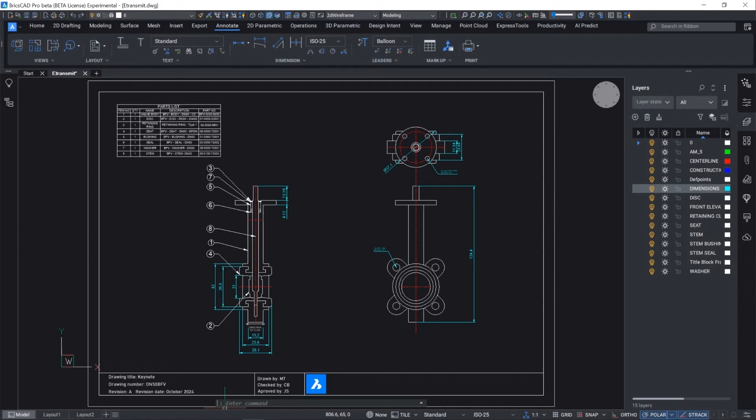For the breakout, we're going to create some geometry from scratch because we understand this is something you guys do daily. So we're going to be using the cross-section of the butterfly valve, and I've sped up some geometry creation, but this gives us a good chance to look at the new fresh interface of V25.

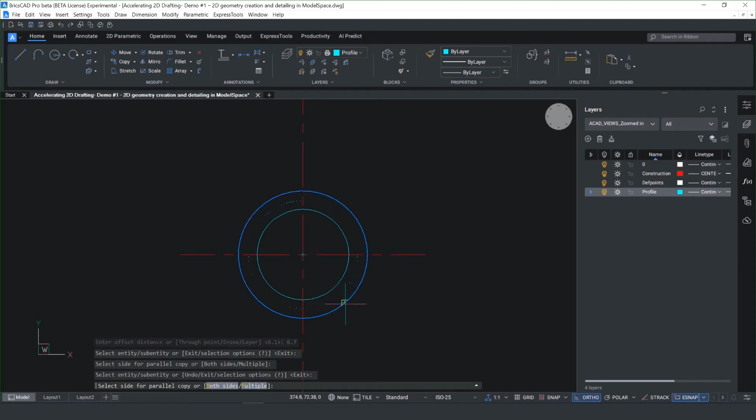You'll notice here the status bar, the icons are a lot cleaner and a lot crisper, and accessing the menus is very easy. The quad command has been updated as well with additional context menus, and also the ribbon layout is much improved, giving you a lot cleaner interface to work with.

Using 2D parametric constraints on this tab enables me to show you one of the new features in V25. You may have noticed in the past when you overdefine a profile, it will then conflict and bring up an error message. In V25, we've got the option now of creating reference parameters to the values.

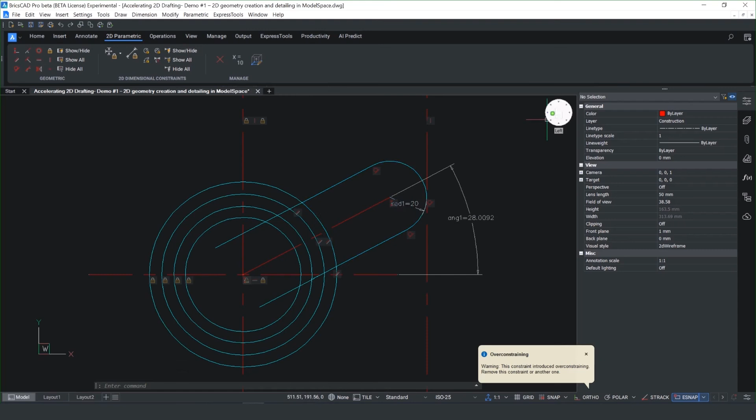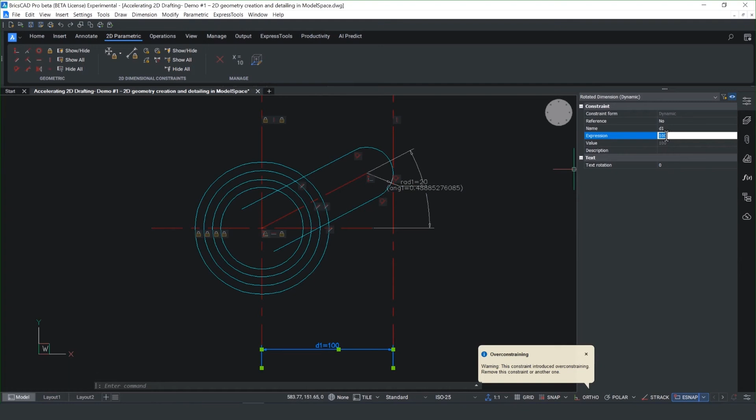Keep the view cleaner by hiding and showing the relationships and dimensions within the 2D Parametric tab, making it easier to navigate. We're just going to build some construction geometry to form part of the stem and also save a view which we can recall later on in the demo.

Now we've got some geometry on screen, we can introduce one of the productivity enhancements we've made to the trim tool. You'll notice in quick mode how sharp the boundary detection is. It's vastly improved and really easy to predict and offers real productivity gains to you, the CAD user. You have much more accuracy when trimming across multiple boundaries.

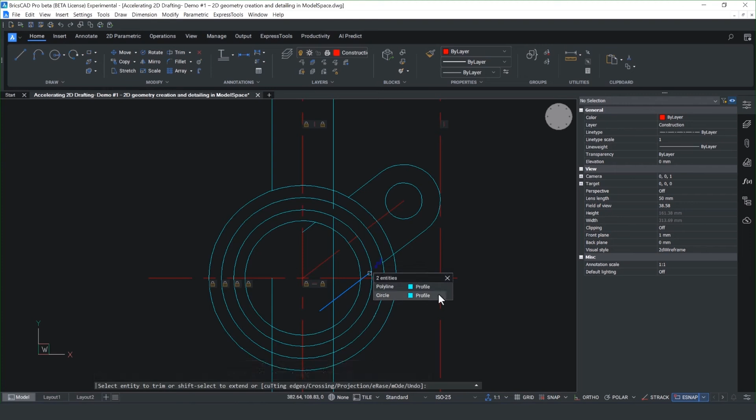You'll notice here the preview is instant, giving you much more feedback as the user. I've also selected more than one entity. There's a tool called selection cycling that's been added this year, which I'll come on to later, and allows you to identify any overlapping entities.

The trim command also works a lot better across hatch boundaries, making it really easy to pick up hatch regions and close boundaries, enabling really fast 2D edits.

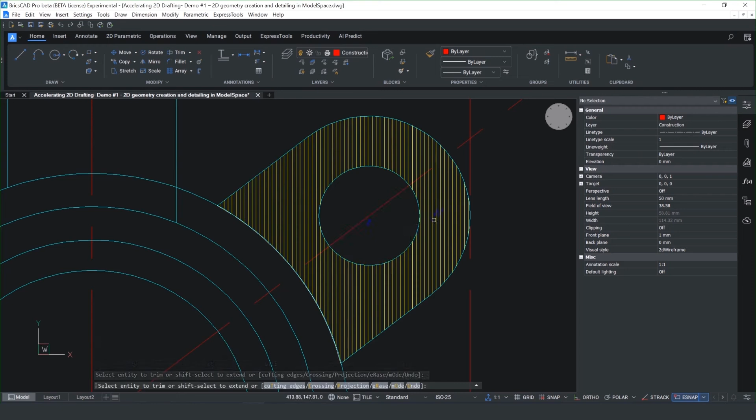I mentioned this when in the trim command, we've added another productivity enhancement called selection cycling, which is new to V25. It allows you to pick any overlapping entities and choose which layer to reassign it to or delete it. And it's great when working with imported files with any overlapping entities.

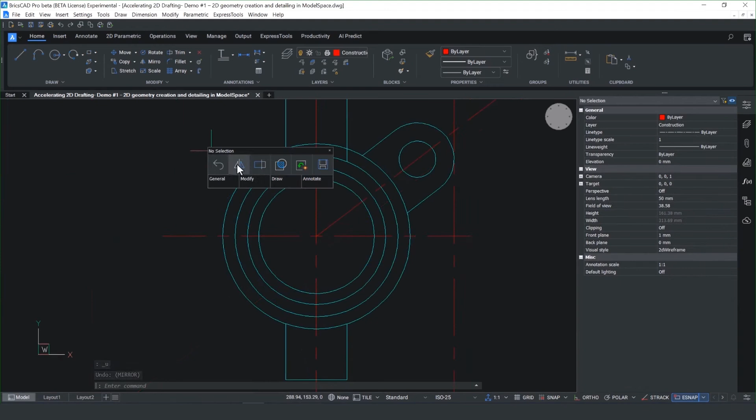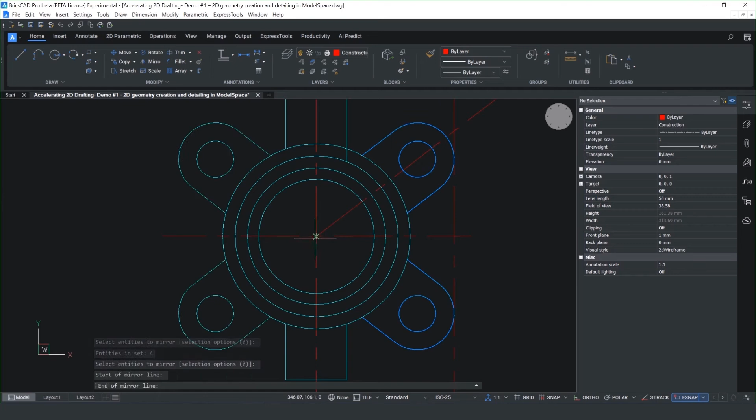Performance and productivity are baked into V25, and the mirror command has been drastically improved. This year, you'll notice now when you run the preview of the geometry, it shows the temporary graphics, and it makes it much more controllable and easier to work with. It's much more predictable and intuitive, particularly for those users that have migrated from another 2D CAD tool. It behaves just as you'd expect.

Brings us to the halfway point of the breakout, and I just wanted to summarize what we've seen so far. We've looked at reference parameters that can be added to dimensions. We've also looked at the enhancements to the trim command for much more accuracy and easier to control when working across multiple boundaries. Selection cycling for selecting overlapping geometry, offering parity to other CAD platforms. And last but no means least, the mirror command, which makes it much more intuitive and easier to work with.

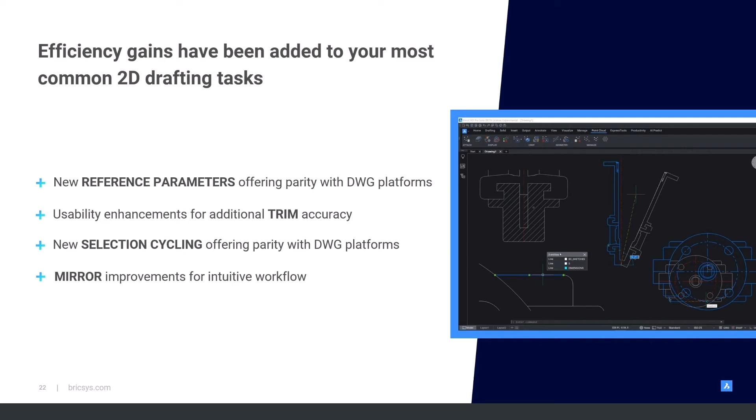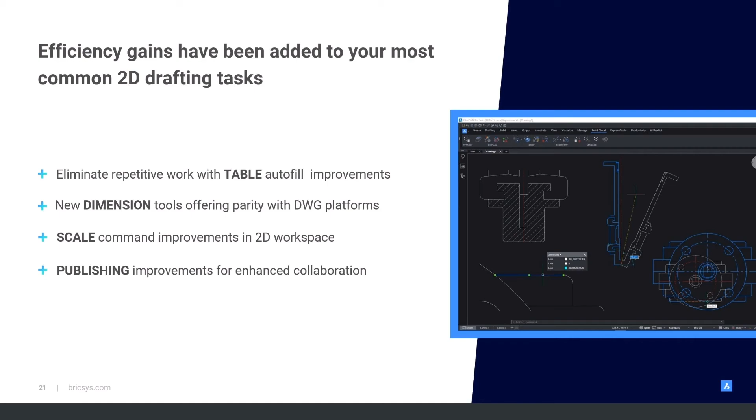In the second part of this breakout, we're now going to look at some of the additional functionality that we've added to BricsCAD for standard tools that you guys use every day. First of all, we're going to look at the enhancements that we've made to the table functionality to give it that kind of Excel-based feel. We'll also introduce the new dimensioning tools that we've offered that adds a lot of parity to other DWG-based platforms. Improvements that we've made to the scale command, which is a commonly used feature, and also the publishing, how we can better collaborate with suppliers.

A regularly used annotative tool is a table. In BricsCAD 25, we can now drag the cell content, and if you right click, you can choose whether you copy the values sequentially, or you can select the value and just copy and paste, giving you that sort of Excel based feel. And it's very quick to duplicate data.

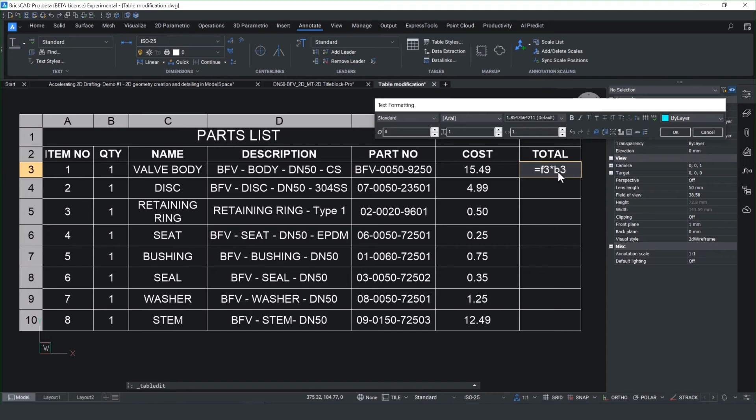The functionality enhancements don't just stop there. You've also got the ability to copy formulas from one cell to another. So you'll notice here, I'm actually looking at totaling up the value for the components. So for this, we can just put in standard Excel-based functions, and you'll notice it duplicates the value. You could then copy and paste the cell content from one to another.

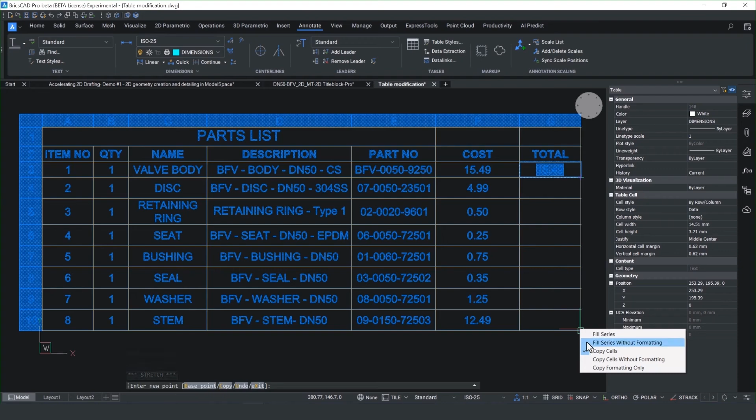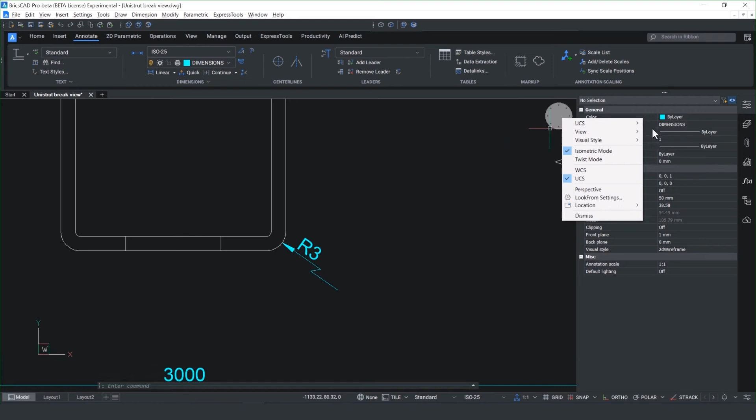We understand detailing documentation is an integral part of your workflow. In BricsCAD V25, we've added two new dimension types. The first one is a jog line dimension that allows you to put a jog line on a radial dimension, making it very clear and concise to communicate your design detail.

Here I've got a standard slotted channel, and I've taken a section view in the middle of the component, and I want to detail this value, showing a break line. And this is a new dimension enhancement we've added in V25, making it much easier and quicker.

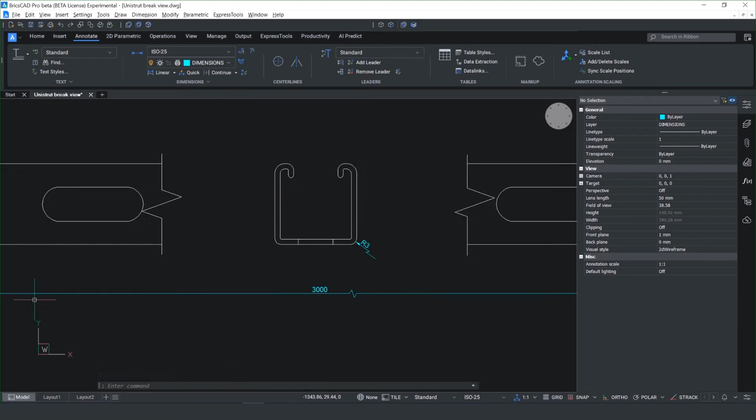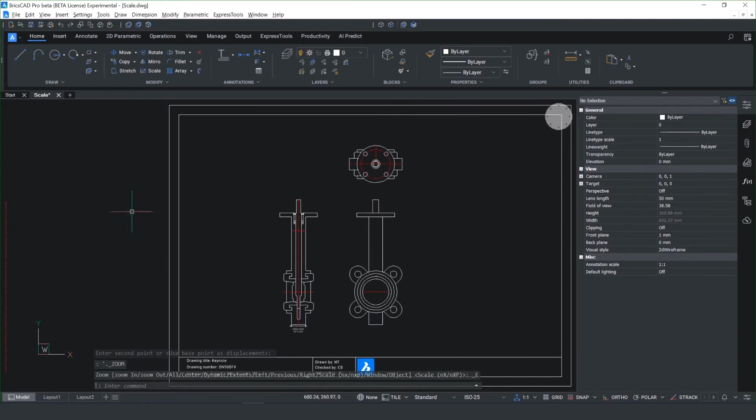We understand many of our customers only work in the model space environment. This is why we've looked at tools such as the scale command. You'll notice now when you drag the preview, it updates live, and it takes any guesswork out of using the command. This is great because it's much more predictable to work with, and it offers great parity for anyone that's moved from another DWG-based CAD tool.

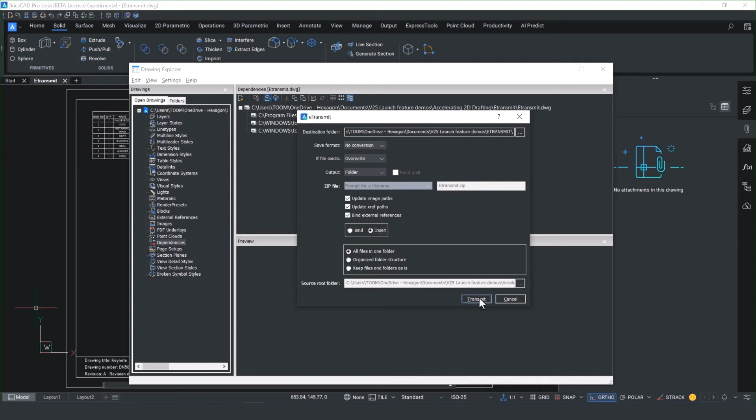To help you publish the documentation now you've created it, we've made some enhancements to the eTransmit dialog box. You'll notice now, when you send a file to transmit, you've got an option with external references to choose whether you bind or insert them into the document, making it much quicker and familiar to users that have come from other platforms.